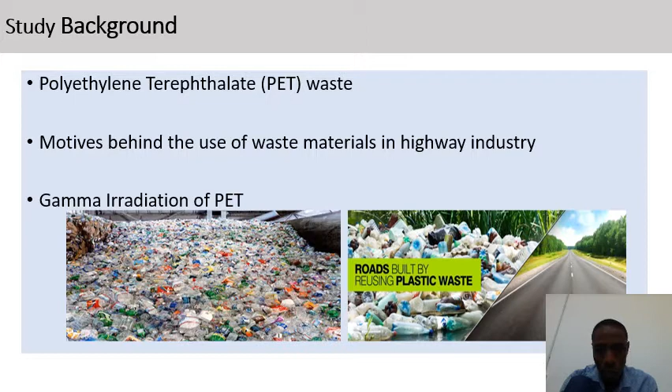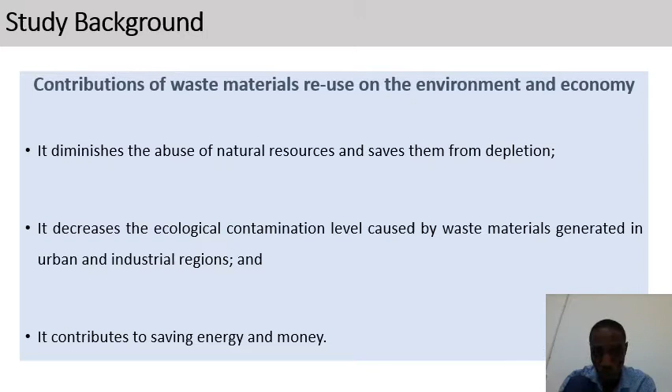Also, gamma irradiation on polymers. It has been proved that when polymers are exposed to gamma radiation, there are two effects that normally occur to the polymer, which are chain scission and cross-linking. So when polymer is irradiated, the degree of cross-linking increases, which makes the plastic become stiffer, tougher, and harder. The background continues as there is a contribution of waste material used to the environment and economy, one of which is to diminish the abuse of natural resources, and it contributes to saving energy and money.

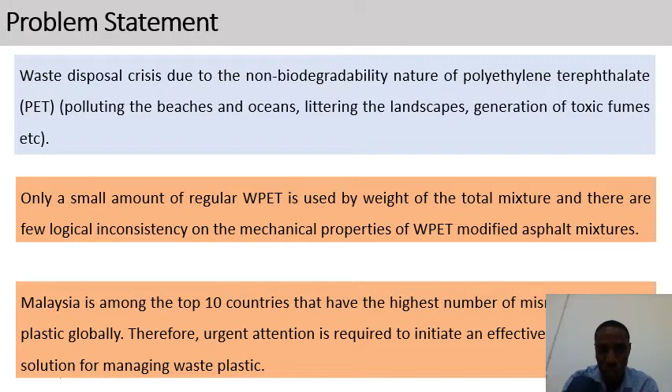The problem statement of my paper is as follows. Waste disposal crisis due to the nature of polyethylene terephthalate. When PET is used, only a small amount of this PET is used, and there are some logical inconsistencies reported on the mechanical properties of the modified asphalt mixtures incorporating this waste plastic. Also, Malaysia is among the top countries that have the highest amount of mismanaged plastic globally. So there is an urgent need to initiate an effective or systematic solution for managing waste plastic.

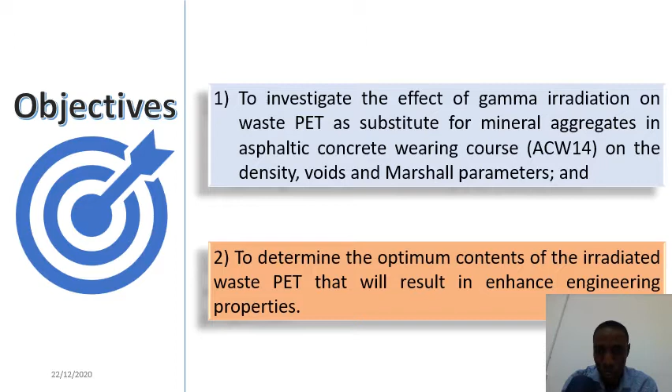Objective of the paper is as follows: to investigate the effect of irradiation on waste plastic as partial aggregate replacement in dense graded asphalt mixtures on the density, void, and Marshall parameters, and to determine the optimum content of this plastic that will result in enhanced engineering properties.

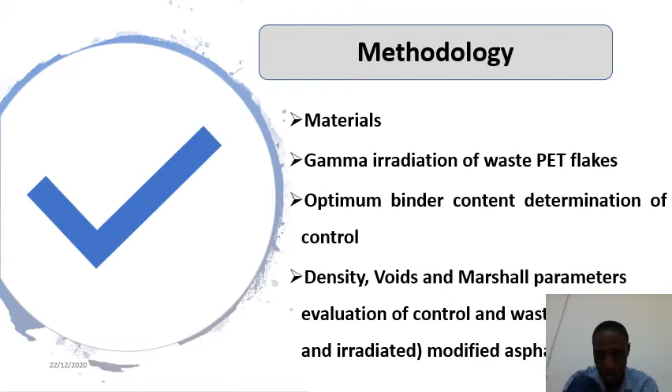The methodology is as follows, as you can see on the slide. We have materials, gamma irradiation, optimum binder content optimization, density, void, and Marshall parameters evaluation. In this paper, the optimum binder content for the control is used for the preparation of modified asphalt concrete mixtures. The methodology continues: first is to acquire the material, then test the materials to ascertain their suitability for use as pavement materials. Then we have the determination of optimum bitumen content, and as mentioned earlier, the bitumen content of the control will be used for the modified mixtures.

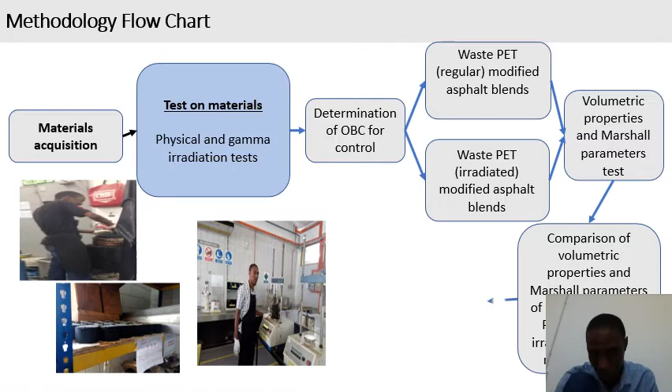Then we have two types of modified mixtures, one containing regular PET and the other one containing irradiated waste polyethylene terephthalate. After which the volumetric properties and Marshall parameters tests will be conducted, and then a comparison of the volumetric properties of three mixtures, that's the control, regular waste PET modified mixture, and irradiated waste PET modified mixture, will be carried out, and based on the comparison, conclusions are made.

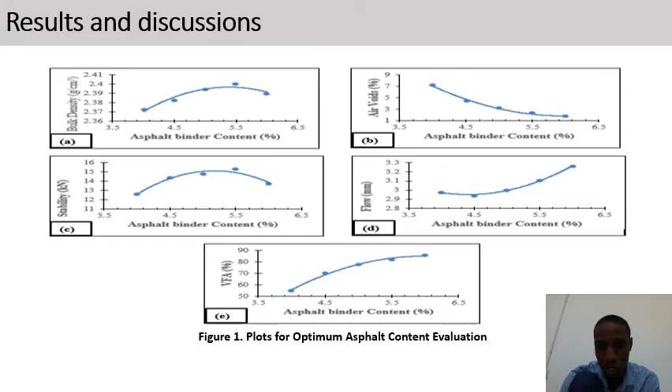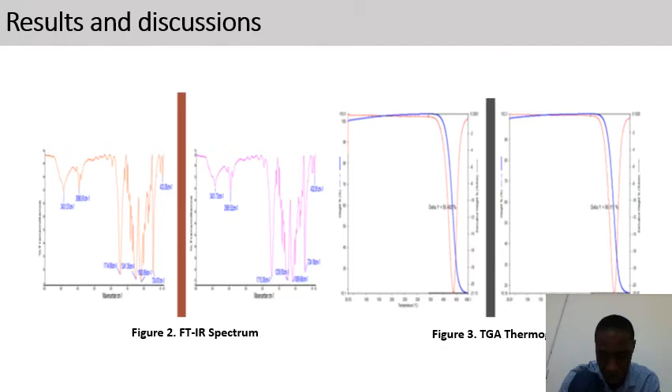irradiated PET, but on the thermal analysis using the TGA, we observe some differences. There is an increase in the degree of decomposition, the initiation decomposition temperature of the PET after irradiation, which validates the effect of cross-linking after exposure to gamma irradiation, and which makes this plastic more stable thermally when irradiated.

The discussion continues with the density, the effect of waste PET on the density. As expected, definitely, because the unit weight of this aggregate is less compared to that of the conventional mineral aggregate, there is a decrease in density as the waste PET content increases in the mixture. Also, looking at the waste PET modified mixture and the irradiated waste PET modified mixture, as you can see, the irradiated waste PET has higher density compared to regular waste PET. This is a result of molecular weight increase as a result of cross-linking that occurs during irradiation.

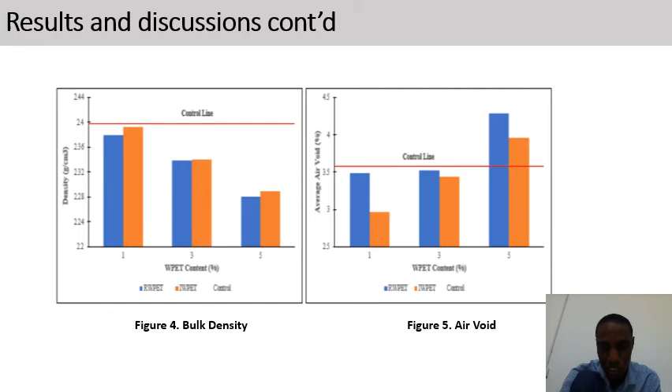Also, the air void increases with increase in the content of waste PET. This can be attributed to the elastic deformation of the plastic when used to replace conventional aggregate under compaction effort. The next figure is the effect of waste PET on the VMA and VFB, which are part

of the void analysis. As you can see, VMA reduces at lower content of this. It increases and then reduces and then later increases. This can be attributed to the behavior of the density and air void content as described earlier, as the VMA is directly proportional to the air void. So as the air void increases, definitely the VMA will increase. And also the density affects the VMA. As the density is higher, then definitely the VMA is going to be lower.

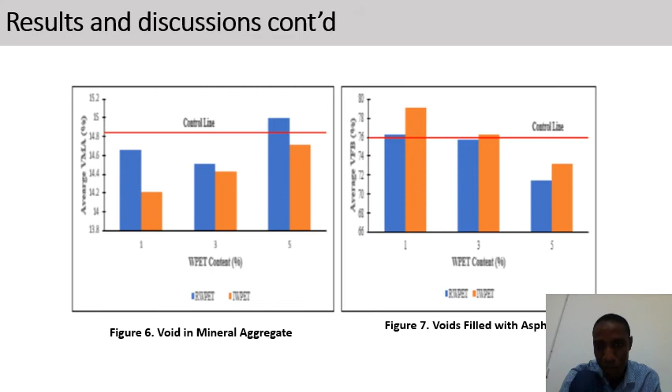Then the VFB shows that the waste PET modified mixtures, both regular and irradiated, have higher VFB at 1 and 3%. Then at higher content of the PET, it is lower than that of the control. But notwithstanding, both the regular PET modified and irradiated PET mixtures have VFB within the code specification.

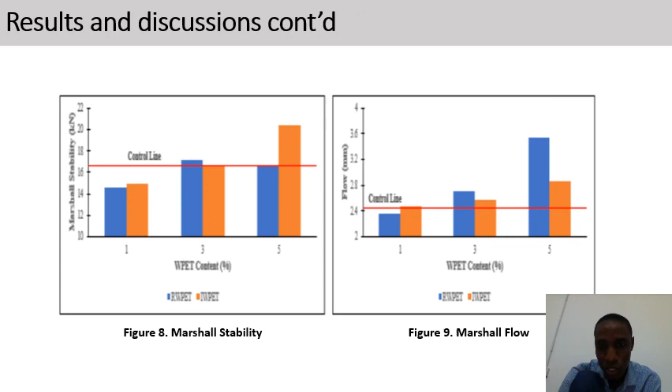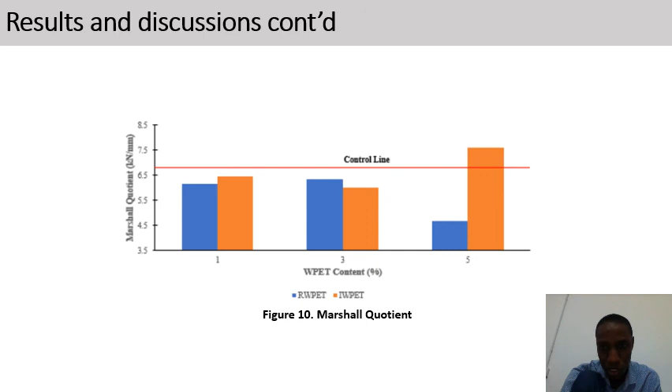Then the flow increases with increase in the PET content, but the flow values are within the specification of the JKR. The next figure is showing the Marshall quotient. The stiffness of the mixture is less than that of the control, but is higher for the irradiated PET mixture containing 5% irradiated PET content.

Based on the analysis carried out, the conclusions are as follows. As you can see, the stability increases, and then due to the lack of time, I can stop here.